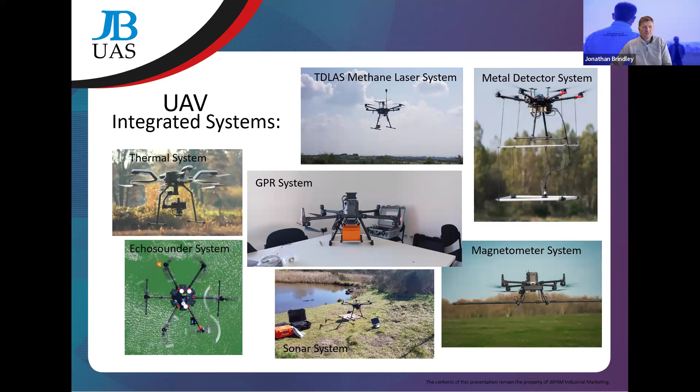Being a bit of a geek, I wanted to give a little bit of an overview on where we are with methane. I know that we're in our bubble sometimes, but a lot of you will be aware that methane's global warming potential is quite significant. Over a 100-year period it's 28 times more powerful than CO2, and over a 20-year period, a shorter period of time, it's 84. So the main thing here is to say that methane has got a high global warming potential, and it's something we need to restrict in terms of our emissions of it.

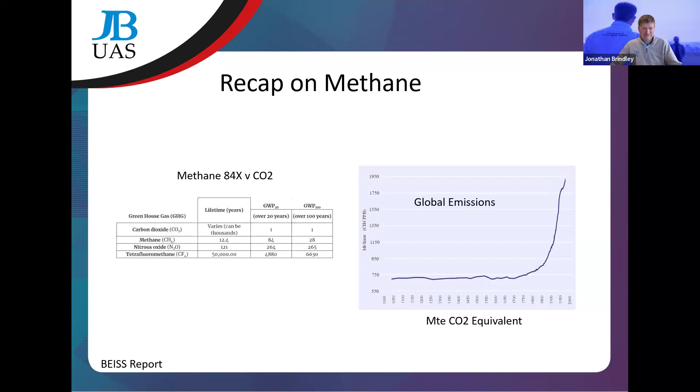An overview there from a BEISS report, these figures here in million tons of CO2 equivalent - you can see here globally that it's going in the wrong direction. In terms of the UK, we've been very successful, I must admit, in reducing methane, both in oil and gas or energy, and also waste and agriculture.

I think they are also now looking at ways that they can reduce their emissions. I know over the last landfill or waste, they've reduced their emissions significantly because of all the work they've done on capturing that landfill gas and generating electricity. So that has been a success story.

But still, the two main areas that I think we can really still make a difference in, regards to helping these companies with their walk downs and their statutory surveys and readings, is in agriculture and in the waste industry - not just from landfill, but also water as well. So it's an area where there's plenty of potential to go at, and ways in which we can help with this kind of technology.

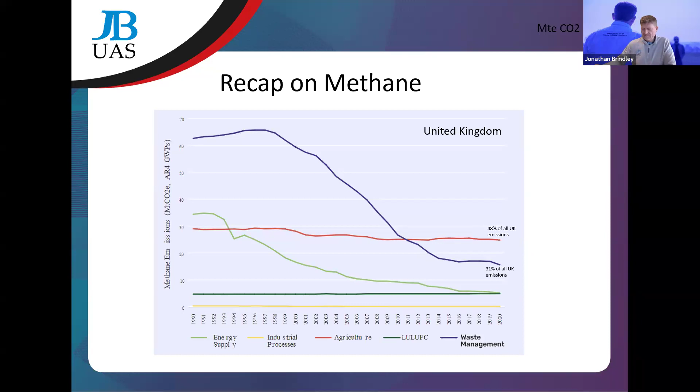I just wanted to put this up because this is quite recent. It was talked about a while ago, but it's now really coming to fruition - the Environment Agency's methane action plan. This is a really good thing. They've started to introduce best available technology approaches, and they're looking, rightly I suppose, to regulate certain technologies that will really help with what they've got to achieve. So that's something to bear in mind - the Environment Agency are really stepping up their efforts to reduce our methane emissions.

So let's look at the Falcon, and look at the core components of the Falcon. As we can see here, there are a number of components, but I'll go through the main hardware ones first, and then we'll cover the software side.

We have the Falcon laser, of course, which is the system actually sending the laser out and reading what comes back, giving us that parts per million reading. We've got SkyHub, which is taking that data and fusing it with telemetry. We've got the TTF radar on the bottom left-hand corner, which enables the drone, once it's taking this data and recording it, to be kept at a specific height above ground - which is really useful for the way that we record the data.

What's missing from there is the drone, but I'll come on to that in a minute - that's a very important part. The software side of it has three main bits of software that integrate seamlessly.

There's the ground control software, what people would know as UGCS, which is where you want the drone to go and its route. We've got a companion Android piece of software that fits on your controller for DJI drones like the M350, M300 - that would be like your DJI Go, that kind of thing. And we also have the custom payload monitor, which is our interface into SkyHub, seeing data come in, and being able to download the data set and height above ground. So these three bits of software work together.

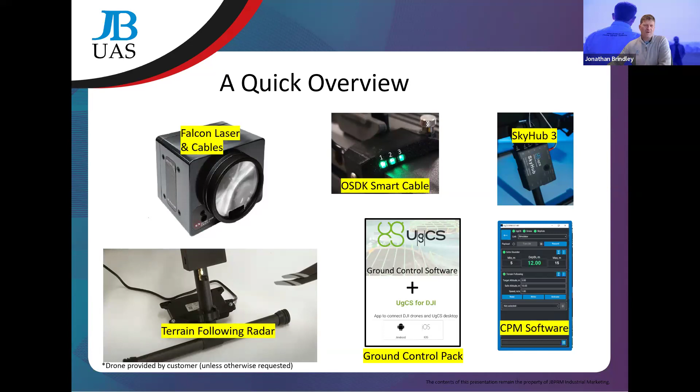But when we combine it with the drone, it's looking a bit like this. You'll have to excuse me, but this is an older SkyHub 2 - it doesn't take away from the actual look and feel of what you'd expect on a standard commercial DJI drone, like this particular one called the M300.

You can see that we have the SkyHub, we have the Falcon, we have the cables connecting - the OSDK cable coming from the drone that's bringing in the telemetry and power to the SkyHub, which is then passing it on to the Falcon. And in the bottom left-hand corner, you can see the radar altimeter sitting just below the leg there, looking to keep the height at the level we want it to be, let's say 15 meters. So that's what you'd expect to see.

The only thing that isn't on there, which we will talk about a bit later, is the anemometer. I'll look at the anemometer a bit later on, because that has an important part in the future. We can cover that later on.

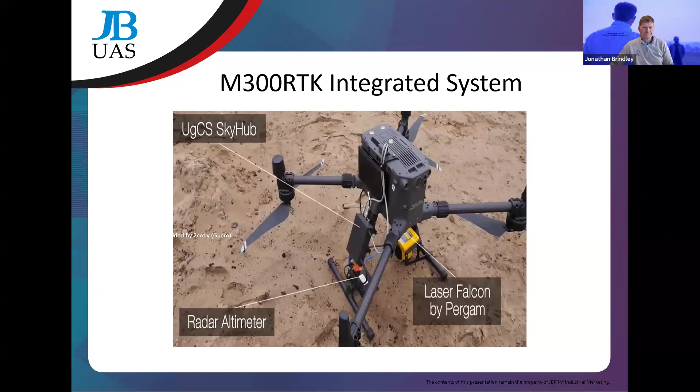So I've talked about SkyHub, which is a really important part. SkyHub is essentially, for DJI drones, the system that implements true terrain following. In this case, we're flying methane, but we want to keep the drone at a certain height above ground. The radar is taking readings many times a second, making sure the drone is kept at that height you require it to be, which is, like I said before, an important element in the way that we take the data.

It's also taking the data from the Falcon into the system, and fusing that data with the UAV telemetry. So when we get the data in from the Falcon, we take the telemetry data from the drone, which if it's RTK georeferenced, for example, we then fuse that together to create the CSVs and the other log files that we'll talk about later.

I mentioned it before, and I put it in again here - the new anemometer from FT Technologies, which we will be using on future drones. My understanding is it's able to provide air pressure, wind speed, and direction.

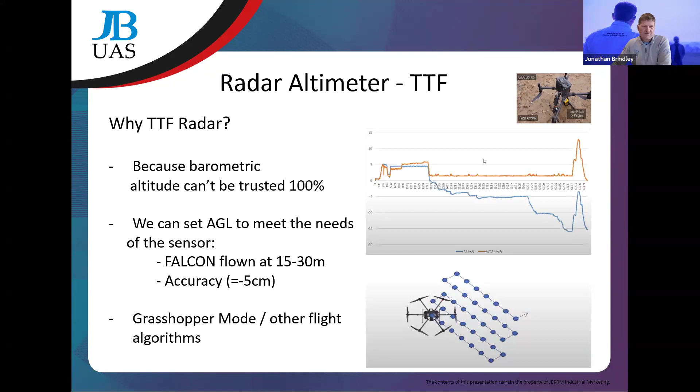The other thing I'll mention - some of you might get involved in other sensors as well, for example echo sounder. There are other algorithms or flight modes you can have, one of which is grasshopper mode, and it relies on the true terrain following radar feature. Grasshopper mode is a very clever system that allows you to fly to a location, drop the drone down to do a task, come back up, and then go to another place and drop down again. It's a really clever bit of programming that comes as part of the true terrain feature. So that's why we have the radar altimeter.

Next on the list is the Falcon 2 itself, the TDLAS system - tunable diode laser spectroscopy, I believe. These are some specifications of it. No false readings from this system - it's only designed to see methane, so you don't need to worry about whether you've detected methane or not, because it only detects methane in the column.

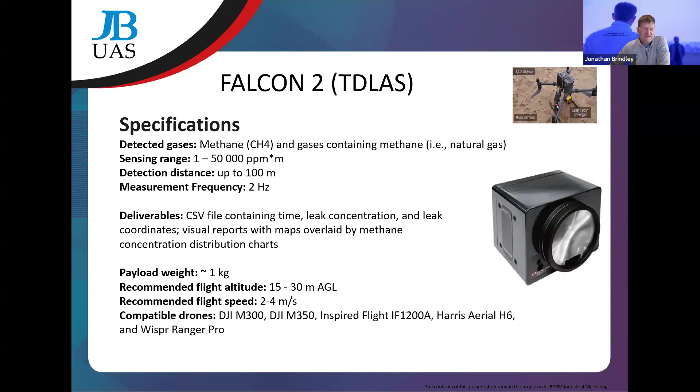So it's quite foolproof in that regard. Sensing range 1 to 50,000 ppm - we'll get into its capability a bit more in a minute. Detection distance up to 100 meters. Ideally, recommended flight altitude is 15 to 30 meters above ground to get the best results. With a payload of 1 kilogram, you get good flight time, which I'll show a bit later. Recommended flight speed is 2 to 4 meters a second - it's down to personal choice, but that's what's recommended. We can talk more about that afterwards; if you've got any questions, please send them in. Continuing with the specifications.

Do we have real-time data transmission? The answer is yes, we do, using UGCS SkyHub and the CPM interface. I'll show you a picture of that a bit later on.

Geotag data, yes, as I said before, the SkyHub is fusing the data with the drone telemetry. So all the data points are geotagged, georeferenced effectively. You get some nice pretty pictures of where your drone's been and where all the plume is. It's all done by SkyHub.

The programmable flight route, yes, it is. It's all done with UGCS Pro in combination with CPM. I'll cover that a little bit more later.

Power supply, again, we provide the power to Falcon via the 12-volt supply from the SkyHub. As part of the kit that we sell, that comes with all the cables, so it's not something you really need to worry about. This will all be provided for and explained how it all fits together.

Tests at SPH Engineering have shown that they can still get fairly decent readings as high as 8 meters a second. Again, like I said, this is personal choice. Once you do some testing and realize what you're able to get at certain speeds, you can make that call as an operator to say, we're going to fly at 5, we're going to fly at 6, or whatever works for you. So that's really up to you.

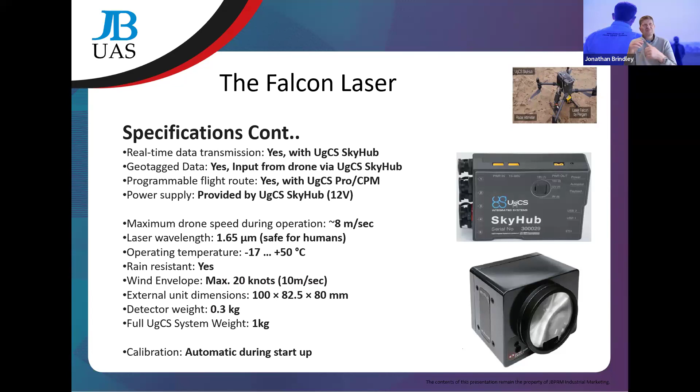A question I get asked a lot about is calibration, so that's why I've put this at the bottom. Calibration is automatic. Every time you start the system up, it goes through its own automatic calibration process, and that's useful to know. So you don't need to worry about calibrating it.

It's all done automatically. So a little bit about configuration and setup. I wanted to get across really how quick this system is to set up and configure. I've set it up a few times, and yeah, it's rapid.

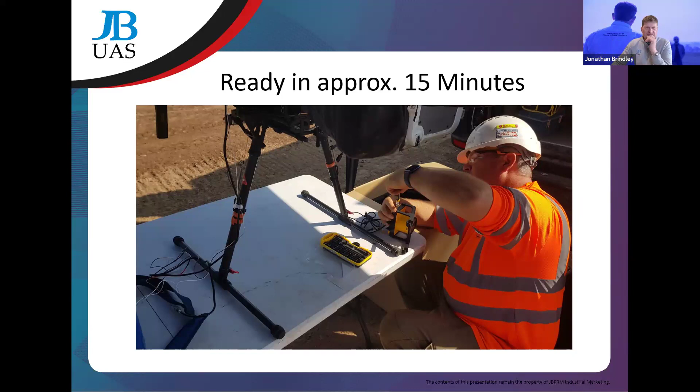There's a chap there, Steve, who's putting the Falcon together. Taking him probably 15 minutes.

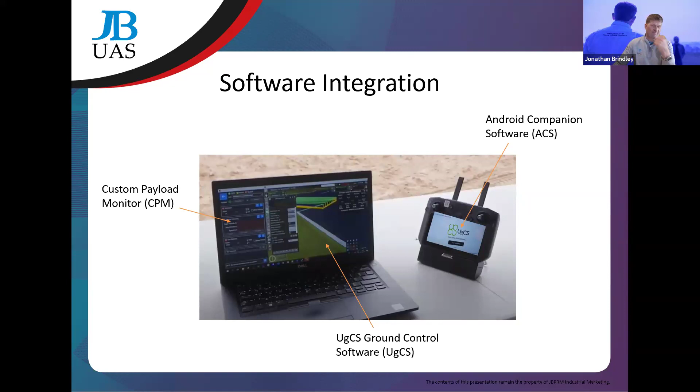The first stage of setting this system up is essentially making sure you've got the software, the 3 bits of software we spoke about, and you can see them. It's all integrated. You'd have to pretend that the UGCS is on and working on the controller, but it's a snapshot I've put on there. You can see that UGCS Pro has the route on screen, and on the left with all the blue boxes is the CPM, or Custom Payload Monitor, and that's the bit they all integrate together. That software setup actually takes probably less than a minute to get all set up. It's a very quick process.

So in terms of what it looks like on your screen once you've set it up, you can see that you've got CPM to the left-hand side of your screen.

Imagine this is your screen on your laptop when you're out on your desk. On the right-hand side, you can see a landfill site and our route. On the left-hand side, we've got our system showing our CPM, which is showing the altimeter height, what the altimeter is reading, what our target altitude is. It's also showing the gas detector, in this case the Falcon, and in this particular case we have the anemometer as well, showing just its wind speed at the moment.

The new FT Technologies system is able to provide bar pressure and also vector, or wind direction. So there's other data being collected, but the live feed is just giving you the wind speed.

The only other thing worth noting here is that speed and flight plan is done in UGCS Pro. It's only the target altitude and the safe altitude at present that we set in CPM. So it's a combination of the two, but it's a very simple system. Once you've used it a few times, it's child's play.

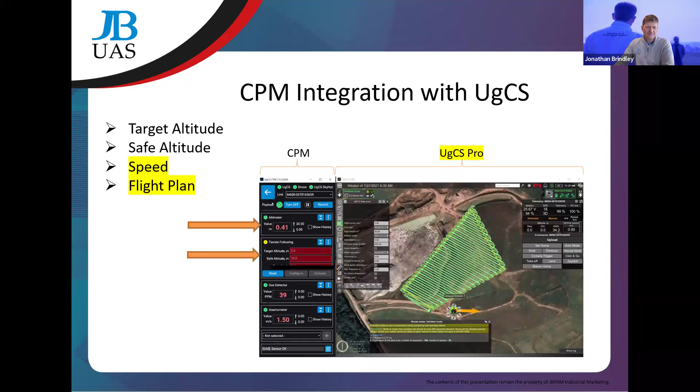Then we've just got to connect up the hardware. We have an OSDK connection, and you can see it in the bottom left-hand corner. We've got the OSDK connector with its new lights. The new version has 3 lights, which gives us indications of its status - is it fully operational, is it communicating to the different systems, are they talking to one another, and so on. Which is a nice touch.

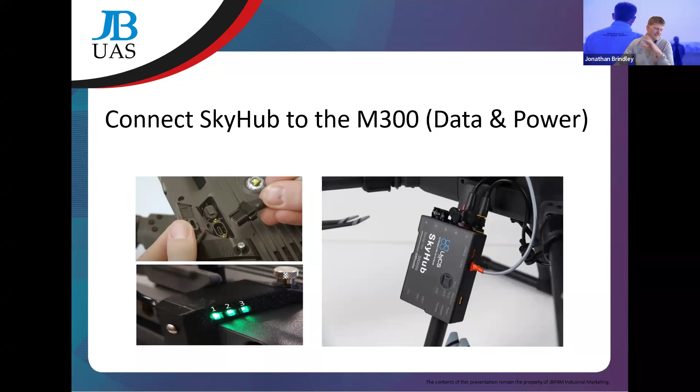And then we connect in, as you can see here, for telemetry at the top - this is this black cable - and we're also connecting in for power into the side, and that's how we're powering up the Sky Hub. Again, this all comes as part of the kit. It's not something you have to think about too much.

Connecting in the true terrain following, you can see now we've got a yellow cable that has appeared on the right-hand side above Sky Hub. That is where we're connecting in this true terrain following radar, which you saw on our drone picture, on the leg on the bottom left. So we're now feeding the Skyhub CSV and logs with the radar data as well, and obviously controlling the drone as well. So that's how we're connecting that up.

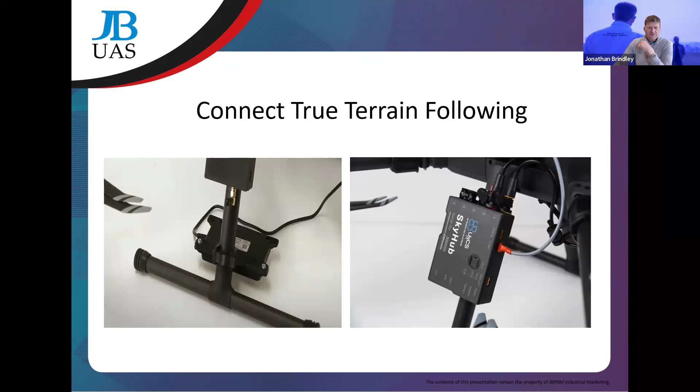Once we've done that, we'll move on to the third stage, which is just to connect it to fasten the Falcon. You saw Steve at the beginning fastening his Falcon into the bottom of his M600. It's not that different for the M300 or M350 - it's connected with its bracket, but the connections again are quite straightforward. We're connecting for power and for data - two cables coming from Skyhub, one for power, one for the data exchange. In this case, we use the USB for data exchange, and I think the new Falcon uses a Type C connector for power. Again, it's very simple - once you've done it a couple of times, you can roll it off really quickly in the morning.

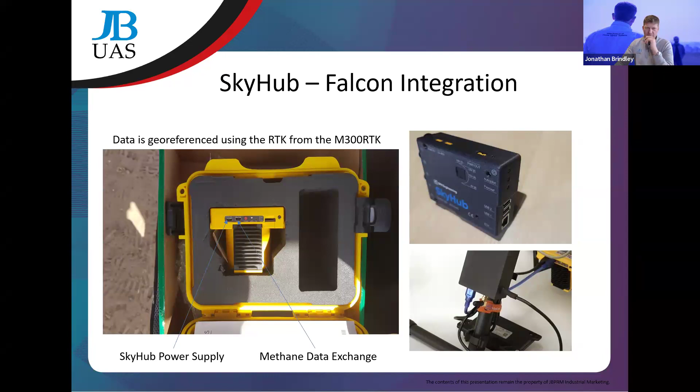So: data access, measurement, validation, and quality. I could have made that a bit smaller, but I wanted to make sure I got everything in the slide. So, getting Falcon data - so what? Some important notes on what you can do. Well, in Skyhub there's a couple of things you can do.

One thing, not actually shown on the screen, is that although Skyhub will take 2 readings - Falcon will send 2 readings to Skyhub per second - there are actually 10 readings per second, and you can play with that in Skyhub to choose how much data you want. The second thing is you can also take into account the background reading - in Skyhub you can say the background reading is X, so we're not worried about that, we want it above that. So any data we get coming in is effectively from 0, because that is background. So you can be a bit clever with how the data comes in.

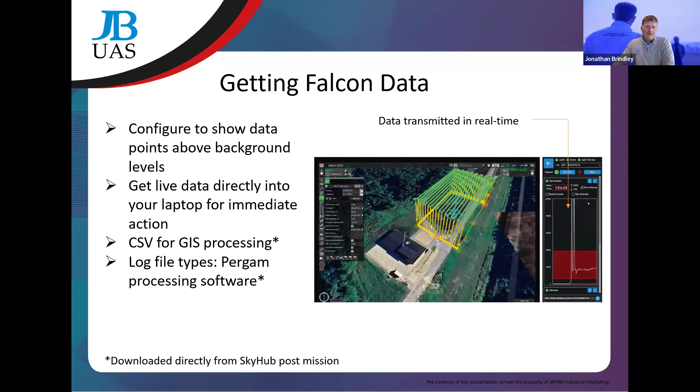So I mentioned earlier about parts per million times meter, ppm times m. One of the main reasons we use this is because of the science of how it actually works. We fire the laser through the column, and we take a reading at parts per million times meter - that column distance. That's how the system works.

However, it does give a lot of benefits. Think of a guy on the ground doing his annual survey, walking around a landfill site or waterworks, getting his readings - he's only getting readings in the top 5 meters. But if there's any wind at all, the betting is that plume has moved with the direction of the wind, diffused upwards and out, expanding higher than 5 meters. Being able to take a reading from above and get readings across that whole distance is a really good thing.

It's a much more accurate way of looking at how much methane is actually there. So in a lot of cases I've been involved in, flying above or around 15 meters is usually what people do, giving readings of what's really down there - as opposed to the guy at the bottom thinking there's not that much there, when really he's just missed it. That's a good example of why we measure in parts per million times m.

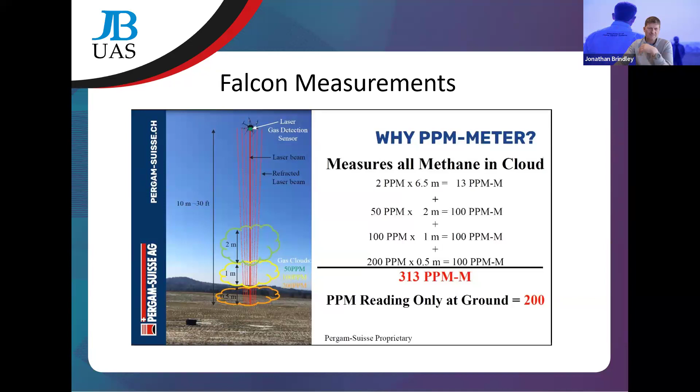Right, so data validation. I thought this was an important slide to include, because you're not going to get 100% data quality, top data all the time. You've got different environmental conditions, your drone is turning at the end of lines, and during training we explain what you need to do at the end of lines and that kind of thing - but that's not for now.

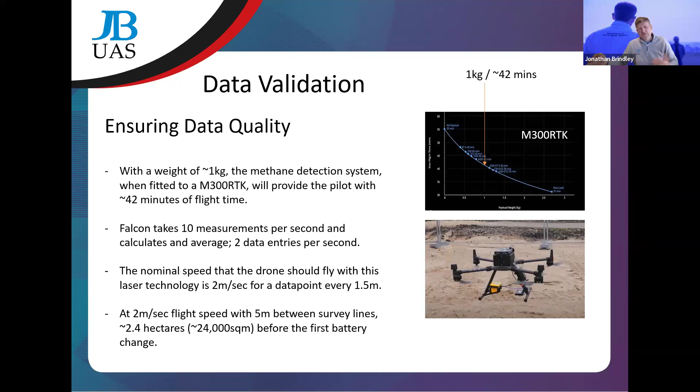Detection, mapping, and flux. Well, this could be slightly controversial, but I wanted to put this in because I wanted to touch on the discussions I'd had with the Environment Agency - nothing heavy, it's just that they're inquiring about the technology and my work with the University of Manchester over the last couple of years. I just wanted to give some indication of where we were now with this technology and where we thought it was going to go. So if I get a call from the Environment Agency afterwards, then that's on my head, but I wanted to say something.

Anyway, the first thing I want to talk about is to give you an idea about applications - the kind of applications you can use this technology for. A lot of these I've had inquiries for: oil refineries, everybody knows you can fly over an asset, then good luck with that, but usually it is an application. Just recently I had an inquiry from a European company for mapping methane from shipping in ports coming in and out, gas terminals, chemical and petrochemical facilities, gas pipelines.

One figure I didn't put up, because it's a long acronym, has to do with land conservation and methane, and budget mapping of peatlands is part of that. That's an area the Environment Agency are really looking at carefully. There's some good ideas there if you're thinking about applications, you can look around and say, we can use that to map that whole facility, and then take somebody in at ground level with an optical gas camera to really hone in on exactly where everything is.

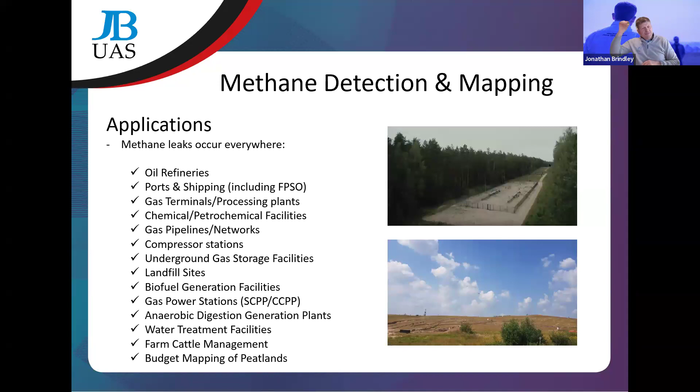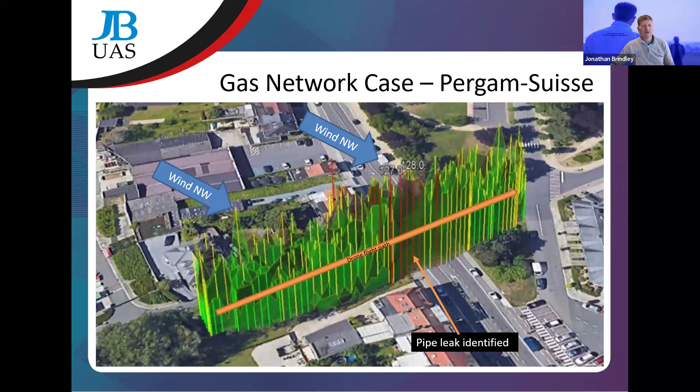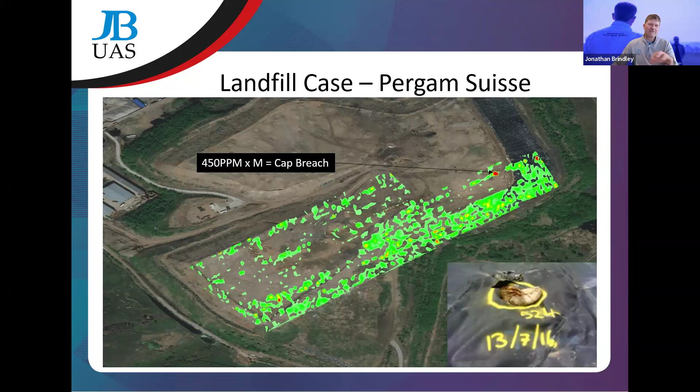So here's an example of where I think we are right now. I think this technology right now in detection and mapping, pre-quantification, pre-flux kind of stuff, we're in a situation where we can empower operators to make repairs, plan upgrades and retrofits, and change policies and procedures.

In this particular case, we've got a landfill site. We had an orthomosaic flown of the landfill site. We then overlaid the plume map of the methane readings over that orthomosaic, and then overlaid the CAD of the actual facility itself. So you've got wells, pipes, generator, diesel gas generation facilities. You can map that asset footprint with the plume, with an orthomosaic, and really start to get some context. I think that's really where we are right now with this technology.

It's really useful. We are pre-flux, pre-quantification, but it's still really useful stuff, and it can help companies who are trying to do the best they can to reduce their emissions and uphold their ISO accreditations and permitting. In this particular case, we were utilizing the CSV export into a GIS, and everything was just layered on. If you've got somebody within your business that does that kind of work - there's plenty of businesses outside that specialize in this area, but it tends to be within the business, the operators themselves - they can really get some good context and make some real differences to their operation. So that's where I think we are today.

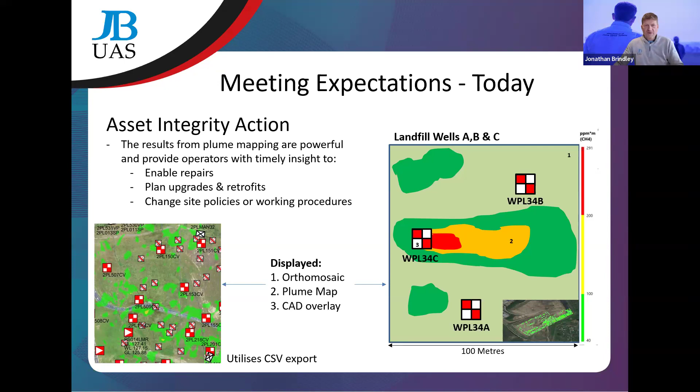This is where it gets interesting. Tomorrow, I had a call with the University of Manchester a few months ago, and I think they were talking about 12 months before they'd be able to provide an approach that uses this technology. So at the moment we're mapping and detecting, but we're hoping with this new development of flux calculation - this software that not just the University of Manchester, but others are putting into place - we will be able to move to that.

So yeah, quantification. I just have some bits and pieces here. You'll all be aware of COP26, 27, 28, more of a push for companies to engage in 14064 and be able to increase operations, decrease emissions, and have better asset integrity management. So that is the idea behind the Falcon - when we see this quantification ability, or this software that allows us to take the data, we can then move into this next stage of regulation.

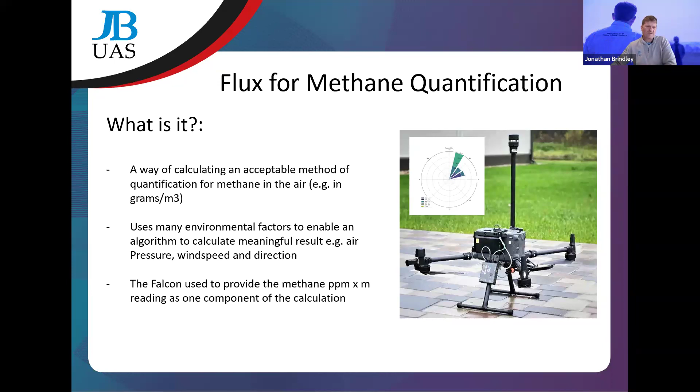So quick JB UAS supply - with all of our kits, you'll get training on all the kits, how it all sets up. We'll take you through all your trialing. It's not just about here's some equipment and off you go - we will do the full wrap with ongoing service as well. So if this is something you're really interested in and want to move forward, you need to be reassured we're with you all the way. It's not just about giving you kit and saying off you go - we'll be with you all the way, and we'll make sure we support you through your trials.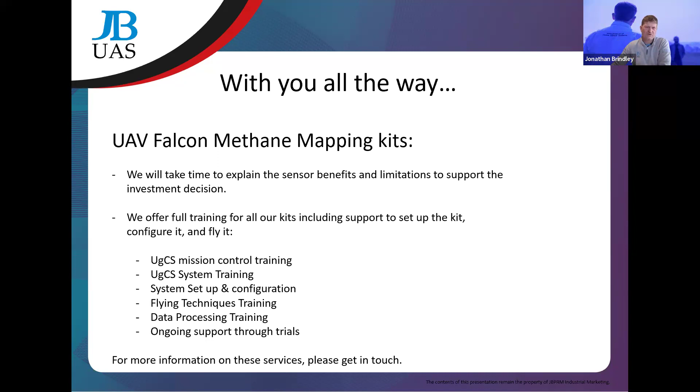So that brings me on to Drone GIS. I've probably got about 10 minutes left, so hopefully I've not killed it too much, but I'll hand this over to Alexia now. Hopefully you've got a good understanding of what Falcon is, what it can do today, and what we might be able to do tomorrow, all the components. If there is anything else you want, please make sure the questions come in.